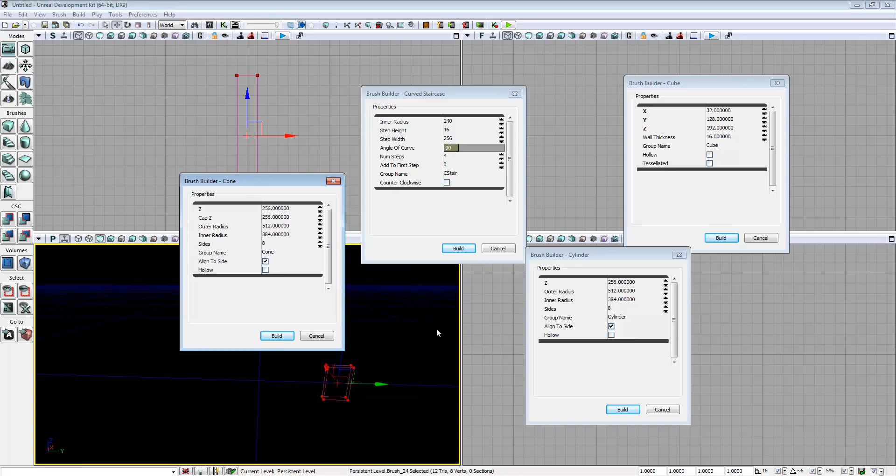Our brushes that we can use are located over here. Left-clicking on a brush will build it to the last set settings that you have on it. And right-clicking will bring up properties that you can use then to define different aspects for that brush. As you can see, we can have multiple brush property windows open. Generally, I think that's a bad idea. Makes a lot of clutter, so I would not leave those open.

So for now, let's take a look at how to build a simple room using individual pieces. Then we'll take a look at how to build a room very quickly using hollow pieces. So if I right-click on the cube, I will bring up the property window for my builder brush here. Let me go over here and find it. Actually, move that back over there.

All right. So one thing that's immediately worth noting on the UDK, I'll explain those numbers in a moment, is the axes. Unreal is a Z up world. You can see that my Z value is 16, and if I look at my perspective, you can see that this piece here, the smallest portion, looks like a floor piece.

The other interesting thing about the Unreal environment is that X is on the vertical axis. So if I change this to 1024, notice now, I changed my X value, but my vertical axis is what increased. So that does take a little bit of getting used to.

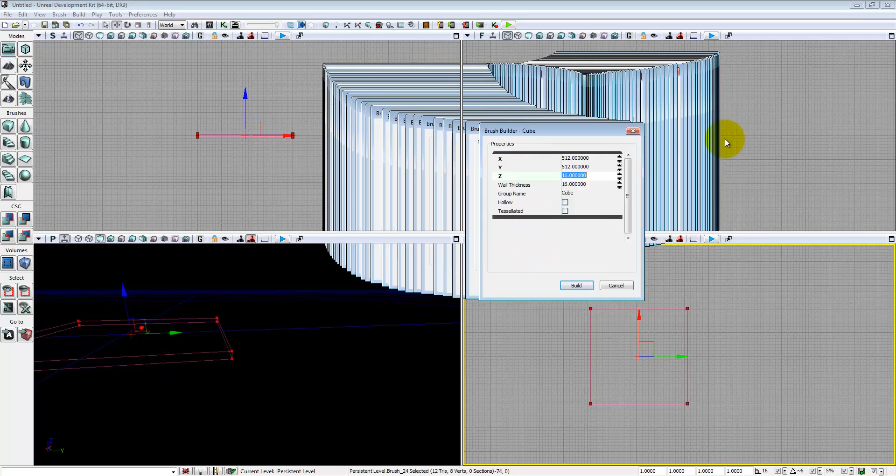Okay, to start off with, we're going to build a 512 by 512 by 16 room. And let me move that over there. That's a little bit better. Now, when you build a brush, you need to make sure that you keep it snapped to the grid. If I zoom in here on my front and side views, I can see that my brush is off the grid. Anytime you build a brush, check it to make sure it's still on the grid. It likes to knock brushes off the grid when you build new brushes.

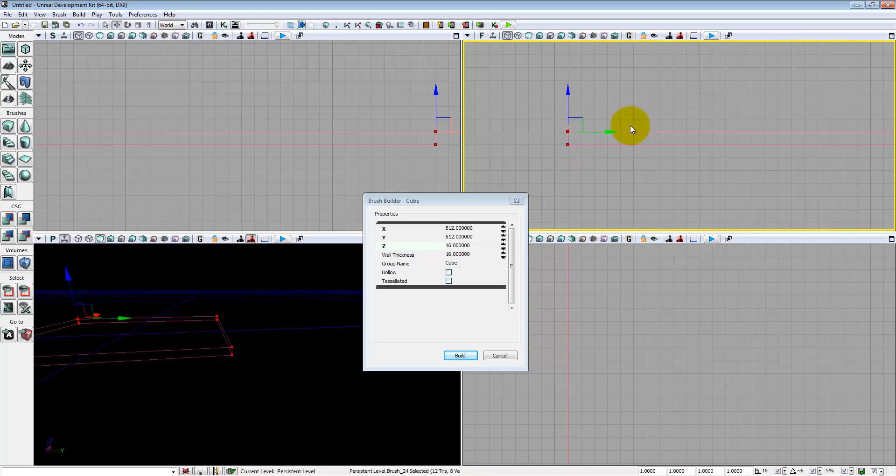If I shift right-click on one of these vertices, it will snap that vertex to the nearest available grid point. And now, with that snapped on, I can add in the geometry. To do that, I can either click on this button or do a Control-A for add.

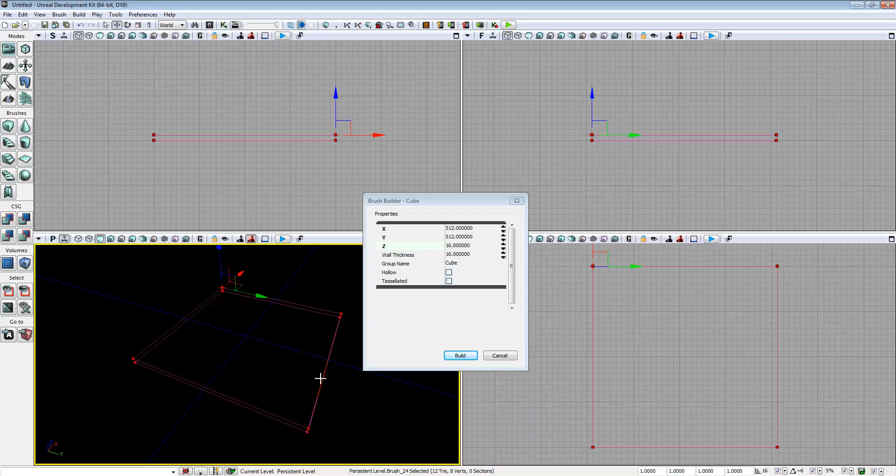Now, before I add that in, I'm going to take a quick moment to talk about materials. I don't have the materials selected yet. I'll do materials in another video. When you add in a brush without materials selected, you will get this checkerboard pattern. Now, I actually strongly recommend keeping this checkerboard pattern when you are developing your levels, because each one of these little squares here is 64 units. And so it gives you a really convenient measuring tool when you're working on things.

So with that added in, if I move my builder brush out of the way, we can see that we've got this blue brush left behind that's the same exact shape. That is our addition brush. And we'll see a subtraction brush a little bit later. So now I've got my floor. I'm going to go ahead and do my walls then. I'm going to set my X to 16, leave my Y at 512, and change my Z to 256.

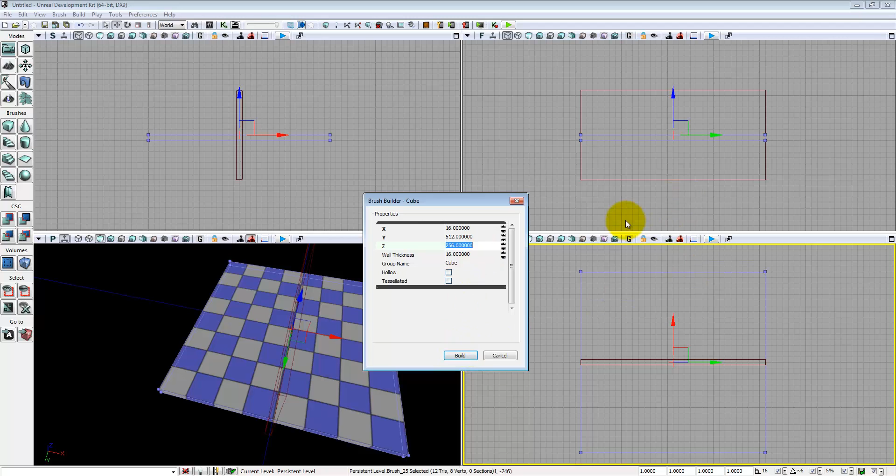Oops, did not mean to grab that one. So grab my builder brush, drag it up, and actually zooming in here, yep, I'm off the grid. Snap that onto the grid, move this down and verify. Now there's a couple of ways we can do this.

One way is to have the wall piece resting on the floor. Now this will result in me not having a true 512 by 512 floor. The other way is to have it off to the edge like this. Now when you add it in, assuming that I don't have it too high up, which I do, you won't be able to see the gap right here. There won't be any gap. It'll be perfectly matched up.

It doesn't really matter too much which of these two methods you use, except if you know that you're going to be looking at this shape from the outside, doing it this way is going to look a little bit weird. You want to make sure that things are resting on top. So that's how I'm going to do this. Everything looks good. Control A, add it in. Zoom up. Move my builder brush over here, Control A, add it in.

Now I can't just simply do a 512 on the X value, because if I do, I will get overlaps, and overlaps are bad. You do not want those. So instead I will use the middle mouse button to measure, so I'll click with the middle mouse button and drag, and I can see that I need 480 units. I could also do it by knowing I've got 16 thick walls here, so I must need to subtract out 32. You can do math in these fields here. Basically any operator you can think of, which also gives me the 480.

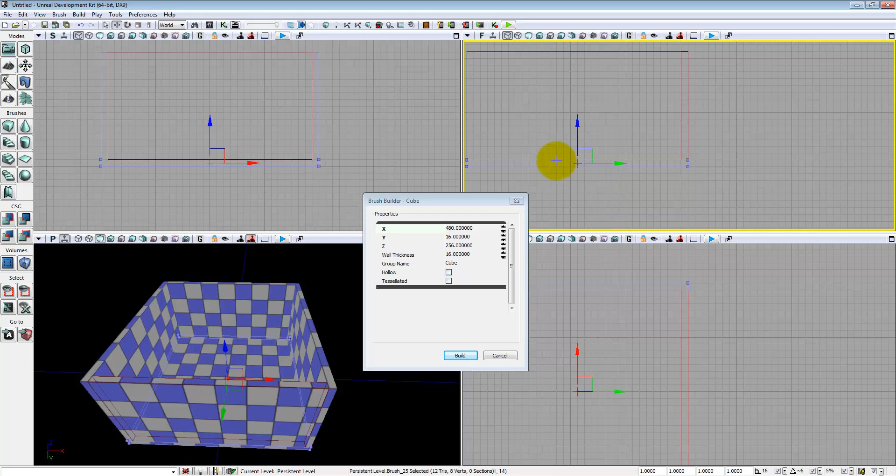Now if I want to duplicate anything in the editor, brush, actor, item, node, doesn't matter, if I press and hold the Alt key and drag, I will move it up. Now notice I don't see it. When you add brushes and subtract new brushes out, Unreal will rebuild that geometry for that specific brush. However, if you duplicate or move an existing addition or subtraction brush, it will not automatically update it. You will need to come up to your toolbar and click on Build Geometry for Visible Levels to see your changes. Anytime you see really weird stuff in your level, most of the time clicking on Build Geometry will fix it.

So for now, I can look in here and say, yep, I've got a room. Now what if I wanted to see in here? I can click on this surface in the perspective view and say Hide Selected, and now I can look in. It's going to look a little bit weird because you cannot see the back side of faces. I can see one side of the wall, I can see the other side, but if I'm looking perfectly straight down at it, it looks like the walls disappear. That's normal, it's expected. You don't want to be able to see the back side of faces.

Alright, so now we have a room. I'm going to move this builder brush out of the way a little bit, and let's duplicate this room over. Actually first I'm going to turn Show All on. I'm going to do Alt-Control and then Marquee Select. I will do an Alt-Left Drag to duplicate out the room. I'm going to hit Rebuild so that I can see my geometry. Then I'm going to Control-Left Click to select these two surfaces and Hide Selected.

Now I'm ready to build my doorway here. The door's going through the X direction. So I'll set my X to 32. Let me zoom in here, it'll be a little bit easier. If I measure, I can see that, yep, that's 32. My Y, I will set to 128. It's generally advisable to not make doorways narrower than that.

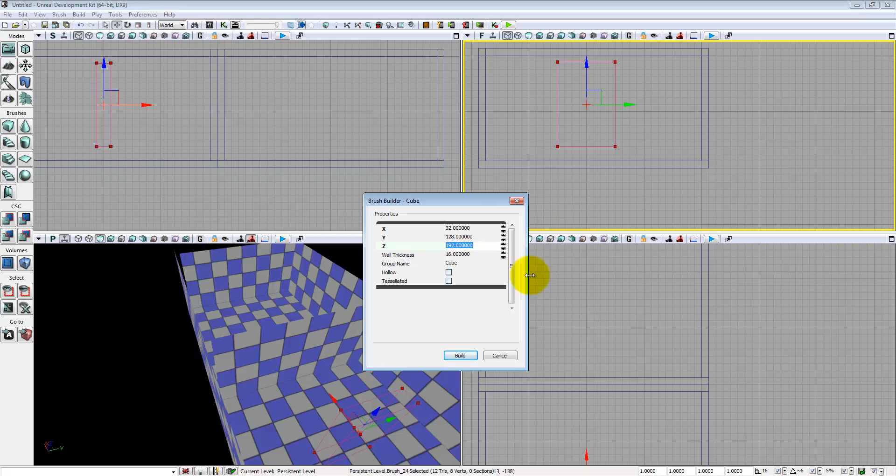For my Z value, I don't want to cut it all the way up to the ceiling. That's not going to look good. Besides which, no doorway ever really looks like that. There's always a bar there. So I'm going to take this down by 64 units, giving me a 192, a little bit shorter than the room itself, but fairly typical for a door. And now I'm going to make sure everything's snapped.

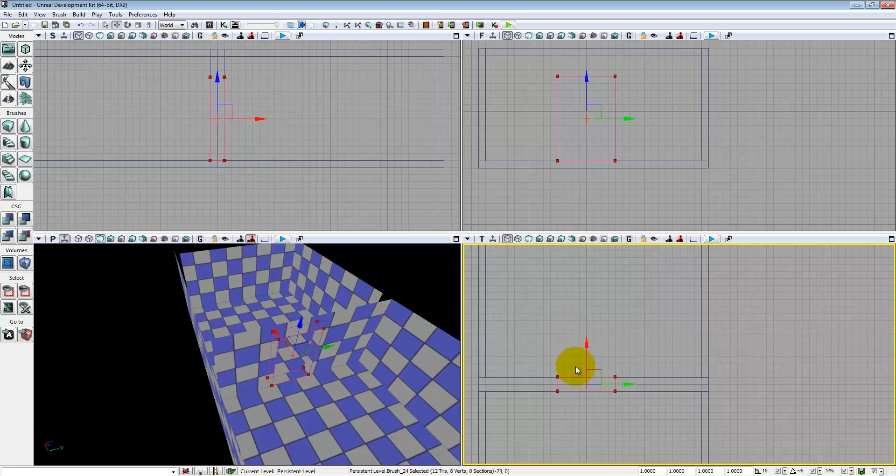All right, get you down on the floor, drag you up over here. Oh, nice, you actually decided to stay on the grid. That looks roughly centered. This time, instead of Control A, I'm going to do a Control S for subtract. That is going to cut out that hole in the geometry. If I move my builder brush out of the way, you'll notice I've got a dull gold brush left behind, and if I select it, it turns bright gold. That's how you tell it is a subtraction brush. And now I have got something I can walk through.

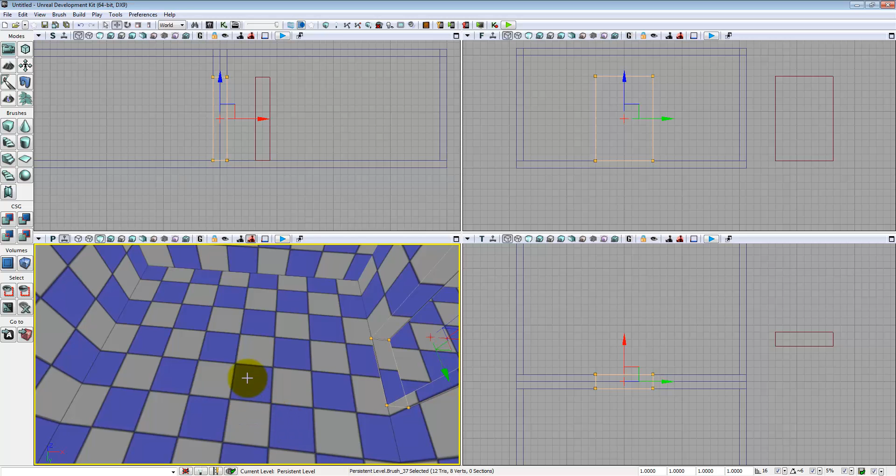Now if I really wanted to walk through this, I would add in a point light onto the ceiling. It wasn't quite far enough down. So add a point light in.

By the way, what I was just doing - if you press and hold the Shift key while dragging something, you will lock the camera onto that object. Very useful for when you need to drag things over long distances.

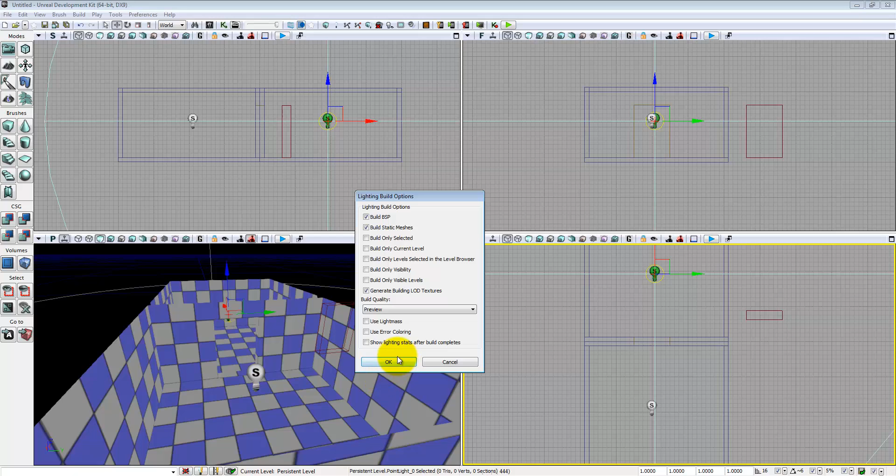I'll come up to my lighting. Whenever you build lighting, it's a good idea to turn off Lightmass. You don't really need that until you're trying to get a feel for what the final lighting is going to look like. Turning off Lightmass allows the lighting to build much faster.

So now I can come in here, right-click, say play from here, and sure enough, I can walk around. There's my doorway - feels fairly natural to go through it.

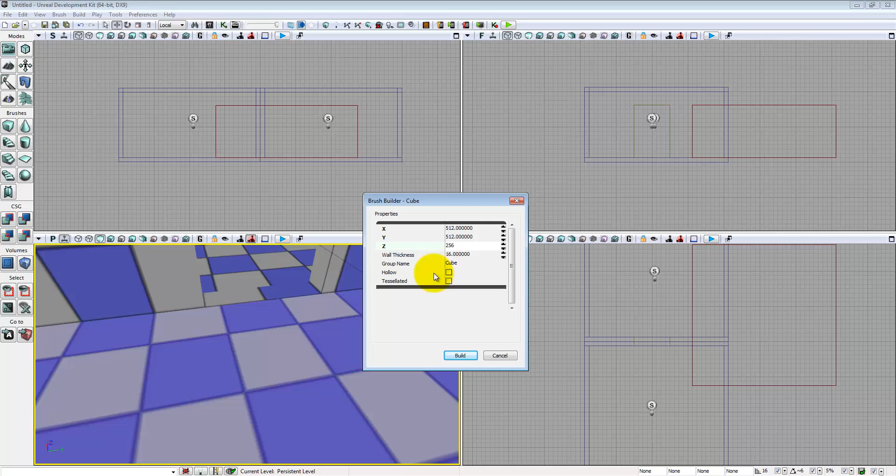All right, so hollow brushes work largely the same way. I'm going to bring this up, change this to 512, 512, 256, and check hollow. You notice it automatically builds something that looks similar to what we have. One minor difference is that it's going to be all one piece.

Notice it's got the same thing. If I layer this over, and correct its height, it has almost the exact same dimensions as the other room. It's 16 units shorter, because I bumped up the height a little bit for my walls.

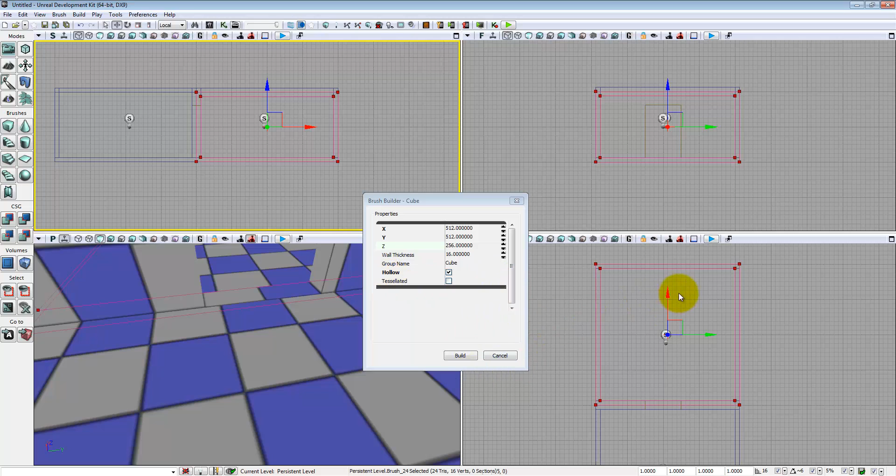So if I put this into position - Control A to add it in. Let me make sure everything's lined up. Yes, everything's lined up, add that in. Get my builder brush out of the way.

I can just go ahead and grab this subtraction brush and drag it, Alt drag it over. Look, make sure everything still is okay.

All right, rebuild my geometry. By the way, it's a very common mistake when you're coming up to rebuild geometry to maybe click on this one instead. If you do that, nothing bad happened - that just changes how it renders in this frame. Just change it back to brush wireframe and you'll be good.

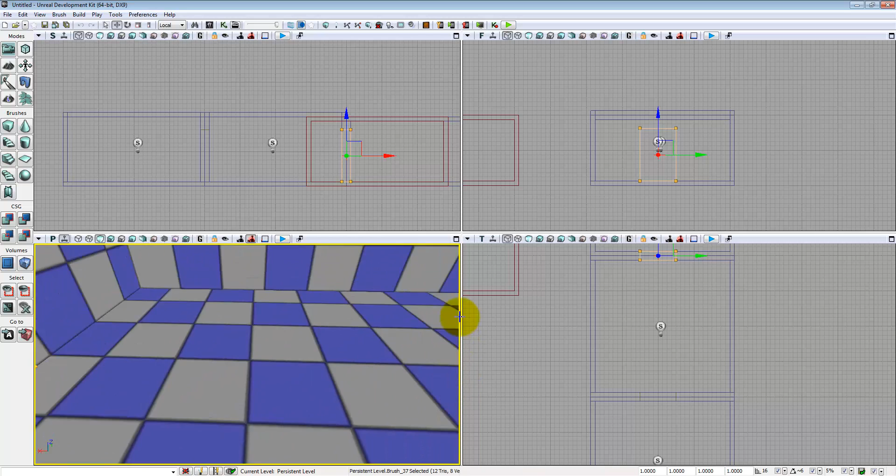All right, and now I can take a quick look. Need to drag over that light so that we can actually see. Rebuild my geometry again just because I'm paranoid. Rebuild my lighting.

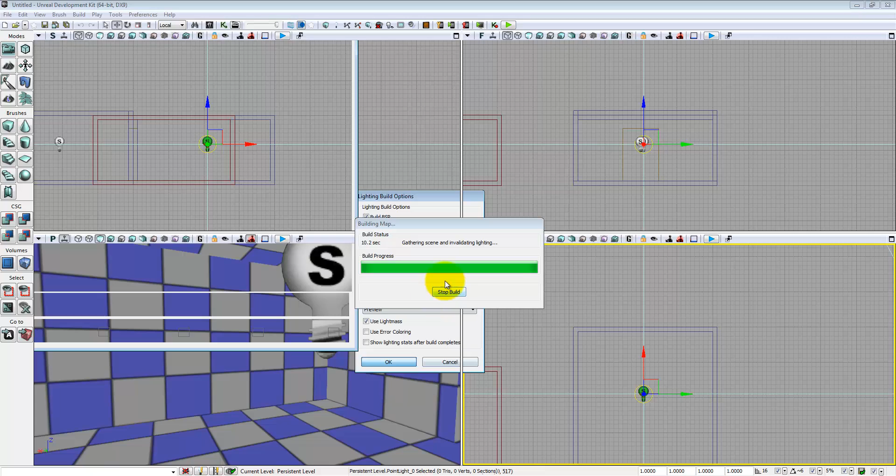Hurry up and wait, because now I've got a little bit more complicated lighting going. Oh, I forgot to turn Lightmass off - that's why. You can see how much longer it took that time with Lightmass on. Not that it really matters so much for such a small area, but for more complicated levels it would make a difference. And there we go.

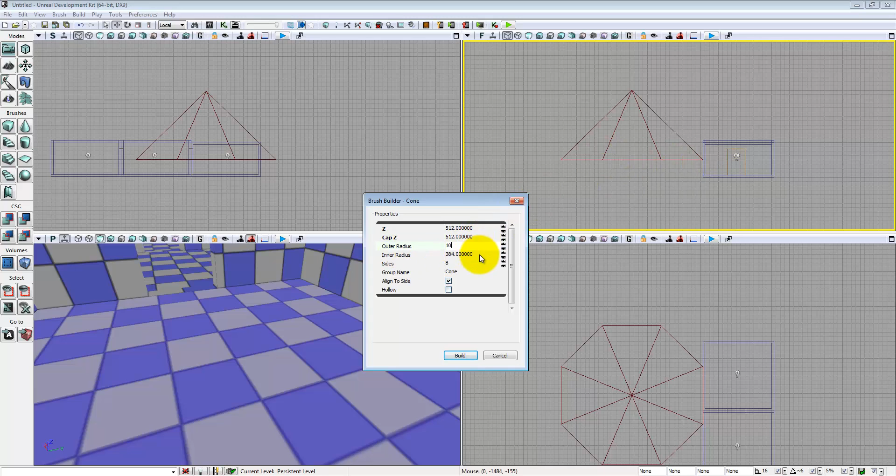Using the rest of the brushes is pretty much the same thing. On the cone, a couple of things real quick: Z refers to how high the cone is. Cap Z refers to, if it's hollow I believe - that's what cap Z refers to. Outer radius refers to how wide the base is. So if I set that to 1024 and build, it builds out.

And of course I can make it hollow. Sides, I can control how many sides it has.

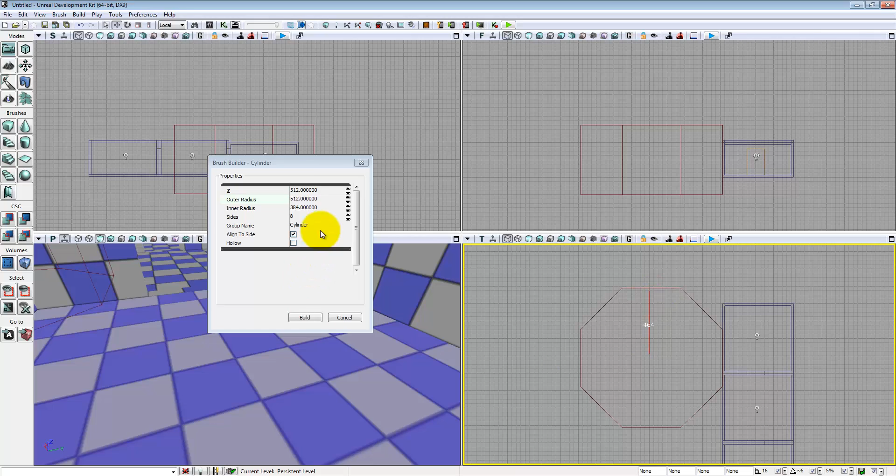A cylinder works pretty much the same way. Z controls how high it is - so if I set that to 512, you can see it grows in size. Outer radius controls from center to edge, how big it is - so if I set that to 256 and build, it shrinks down.

Inner radius only comes in if it is hollow, and of course your outer radius needs to be large enough to support that, so that's why it wasn't working. So there we can see my inner radius - I am off a little bit on my measurement, but the inner radius matches this. So if I bring this down, say 256, I've got thicker walls now. Number of sides does what you would think it does.

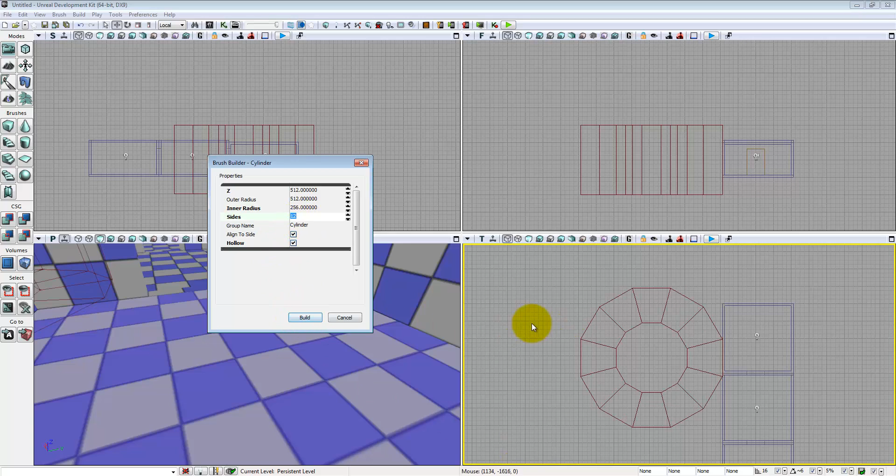A sheet is special - we will deal with that one later. And of course a sphere, which looks nothing like a sphere at first, at least until we get some more extrapolation going up. As you can see now, that does indeed look like a sphere.

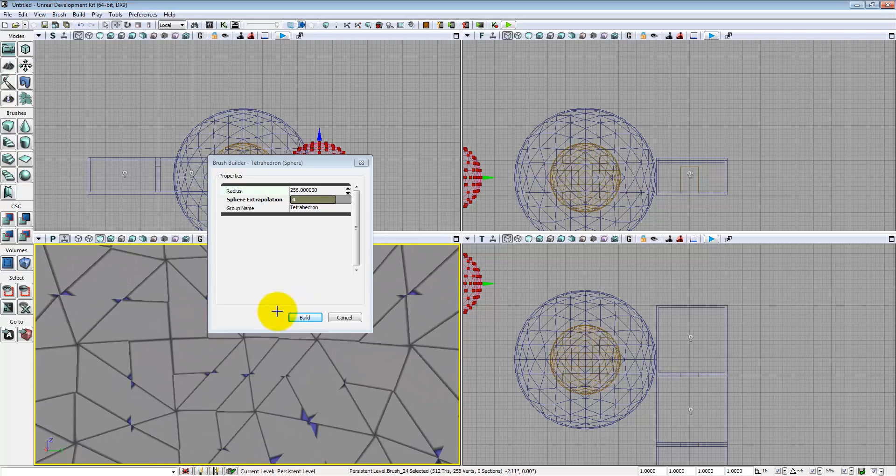Spheres you cannot make hollow, at least not easily. I could make, say, a 512 sphere, add that in, and then make a 256 sphere - oops, 256, not 2056 - and subtract that out. Oops, I don't think it subtracted out. And so now I can come in here, and sure enough, I've got an inner sphere area here inside this bigger one.

And then the stairs - they're special enough that they get their own video, and this one has gone on long enough. So until then.